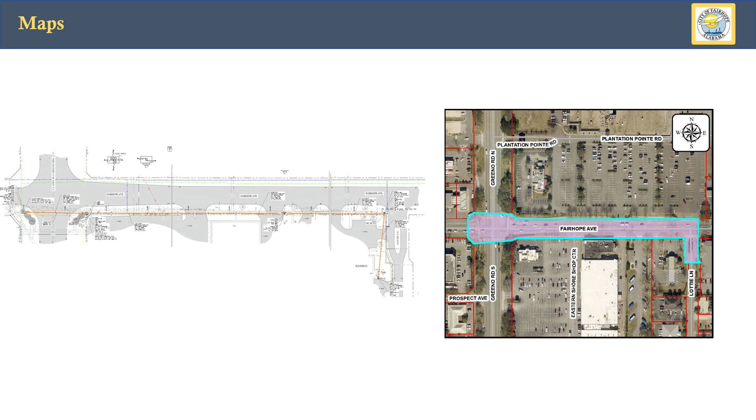Yes, and we do have two of these, so I'll go through them pretty quick. These are pretty much standard. The first one is for 1,000 linear feet. This is along Fairhope Avenue. Familiar, that building right there is the Ecor Rouge Shopping Center. Cafe 98 on the north-hand side, so that shows you the area where this will be installed. Other than its location, there's nothing unique I want to verify here. Just to always remind folks that we can only handle 750 feet of locates in one given day. They can get those beforehand. Those are good for 21 days, and then do all the work at once. But other than that, we do recommend approval of this, with the exact same conditions we have for most of these. All right, thank you, Hunter.

These are not public hearings, but would anybody from the public wish to speak about this item or have any concerns? In that case, I'll go ahead, commissioners.

I'll let you know, I did speak to our right-of-way supervisor about this today, about these first two cases, and he said we were in good shape on everything. He's walked it, and he's met with the contractor on it.

You want to make that into a motion, Aaron? Sure, I'll make a motion to accept. We're going to do them one at a time, right? Yes, let me present the second one, because there's one note on that. But go ahead and make a motion. Yes, I'd like to make a motion that we approve UR 23.04 with staff recommendations. Do I have a second? Second. Motion and a second to approve subject to staff recommendations.

Any further discussion? All in favor say aye. Aye. Any opposed say nay. Motion passes unanimously. UR 2305.

Same project, same type of project. The area is highlighted on the screen, Magnolia Avenue Summit. And the only thing noted here is it takes some care around Church Street. That's a new street we just got finished. We don't want it to look horrible on a brand new street.

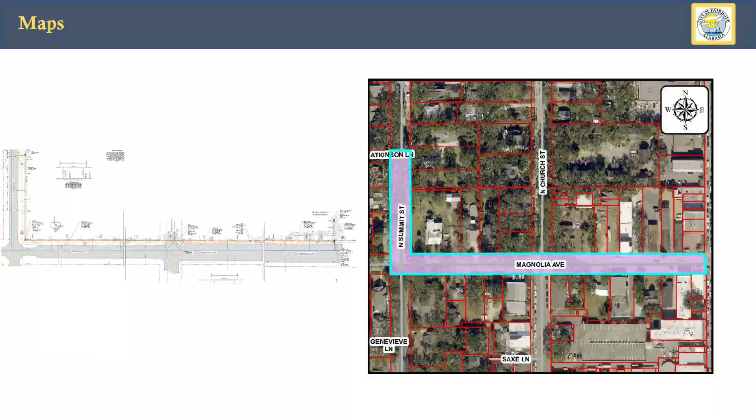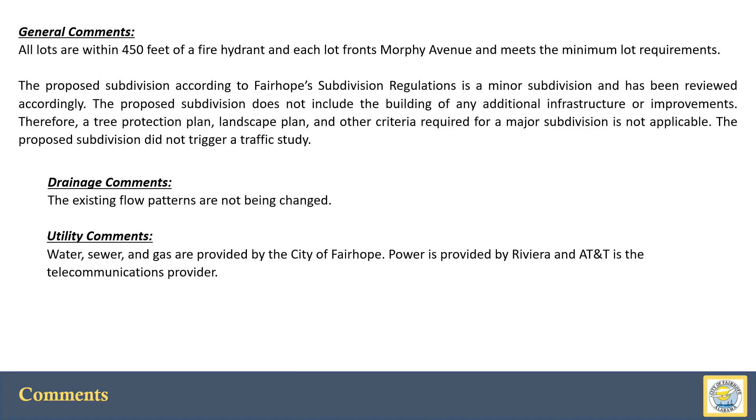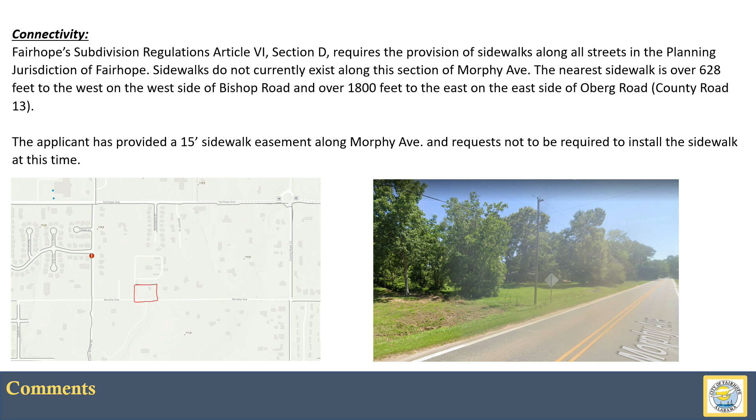I mean, that corner piece is zoned R4, 658 feet to our property. He was saying 650, that's what I was thinking. So at some point you would assume that that would be some kind of multi-unit, which you'd certainly like sidewalks along. And adjacent surrounding, everything in orange is R3, which we do not allow anymore, but it is zoned that way from back in the day.

But sure be nice to eventually be able to walk. I mean, who knows how long that property stays R3, whether it stays R3 1 year or 20 years. Sure be nice to be able to walk to Bishop Road and to the school and other areas. So I'm pretty much on the fence on this one. If it was just a little bit closer, I'd for sure say they ought to build the sidewalks. If it was a little further, no, but this one's just right in that gray zone.

And with the sidewalk coming on the other side of the road, to me, that kind of pushes it into a grayer zone, but.

And that's the same conversation we've had internally.

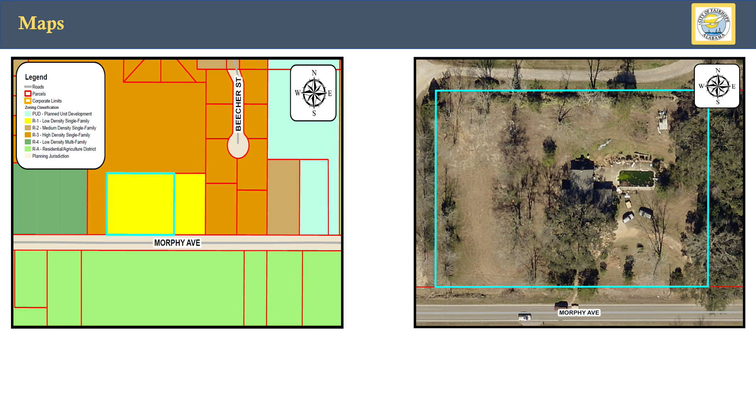As R1, you don't see too many R1 lots these days. That leans me toward, well, okay, let's not punish for R1. But if that R1 lot came in for a rezoning to match some of the other things around, I would certainly hope, whether that's 5 years from now or 20 years, I hope that zoning request would come with a grant to change, would require the sidewalk, if we choose not to require it tonight. Sounds fair.

Okay. I move that we approve SD 2310 Domes Place minor subdivision. Second. Are you subject to staff recommendations? None, there aren't any. Well, don't we need to, should we put that down? I mean, if we don't have a staff recommendation, don't we need to include that we're accepting the, we need to include the waiver, don't we?

It's not a waiver. Remember, we changed the subdivision regulations, so that wouldn't require a waiver that had to be advertised. It's just a decision you make. I mean, shouldn't we say subject to getting a sidewalk? They already provided it. So, oh, that there's a lot of times when people don't put it on, but it's already on the plat.

I'm late, do I have a second? Second. Any further discussion? All in favor say aye. Aye. Any opposed say nay. All right, motion passed unanimously.

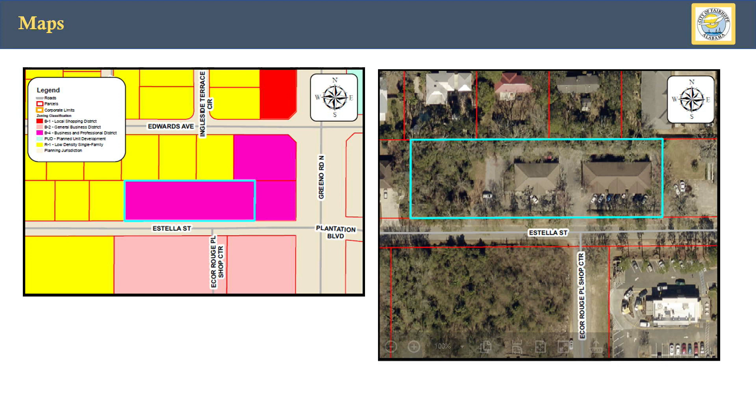And that's what it looks like. There are the 3 lots.

Okay, so all the lots are within 450 feet of a fire hydrant, and they all front Estella Street, and they meet all the minimum requirements. This is a minor subdivision, and it didn't have a tree protection plan, landscape plan, and all that are required for a major subdivision, and it all checked out. Just a note that the final plat has to be recorded within 120 days of approval. So the existing flow patterns for drainage are not being changed, and all the utilities are accounted for.

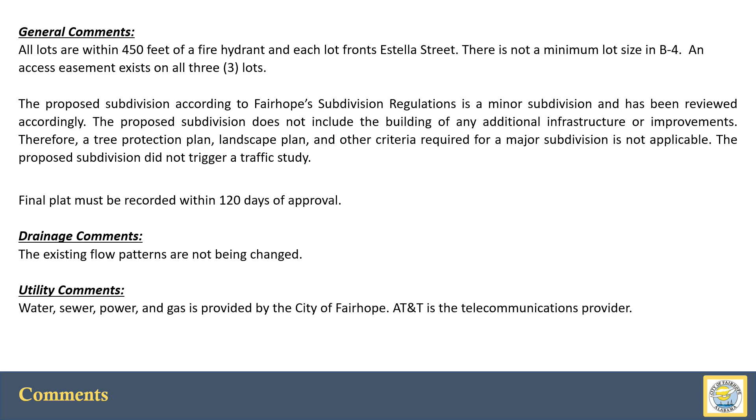So with sidewalks, there are no sidewalks currently on Estella Street, and there are no sidewalk easements on the adjacent plats either. The closest existing sidewalk is 164 feet east on North Greeno Road, and the applicant is requesting not to install sidewalks at this time. However, the Planning Commission allows for a 10-foot sidewalk easement in lieu of installing sidewalks, and there's already a 15-foot utility, drainage, and sidewalk easement on the plat that crosses all 3 lots. The single taxpayer is part owner of the subject property as well as all the other properties along Estella Street between North Ingleside and North Greeno Road, so there's an opportunity to coordinate there.

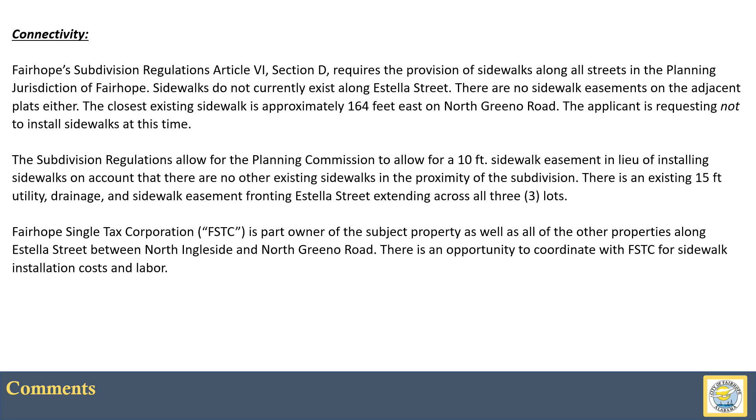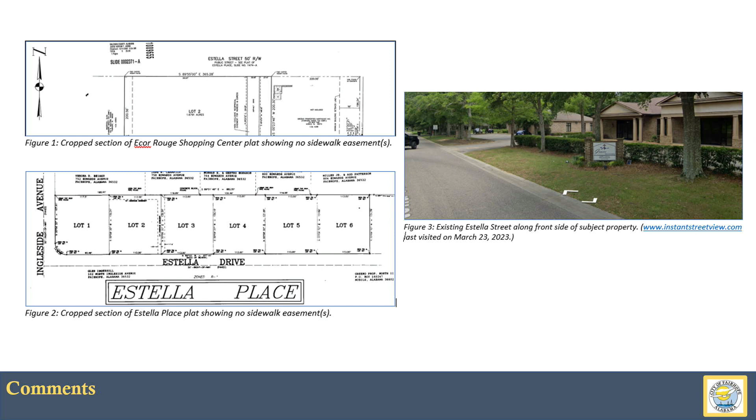So that's what it looks like. There are no sidewalks, and the top is the Ecor Rouge Shopping Center plat with no sidewalk easement. Estella Place also does not have sidewalk easements. And we do recommend approval of the Myrick Place minor subdivision.

Any questions for staff at this time? For what it's worth, we think there should be sidewalks on this one. How far away are we really from Greeno? It's 163, I mean, 164 feet. That's pretty significant.

And it's a big sidewalk down on Greeno Road. It's business, it's going to keep being a big business development across the street. It's commercial, yeah, and it's just one property away. I don't know how they did that originally without a sidewalk. When I was looking at the plats, I thought that was strange too. Neither one, especially the Ecor Rouge, because that was relatively recent.

Any questions for staff at this time? Anybody here on behalf of the developer? Seth?

I'm Seth Moore. On this one, it is a little bit unique because there are a lot of trees between the back of the curb and the parking area for the businesses that are there. If you had to put in a sidewalk there, you'd be right up against the curb because of the trees, you'd have to cut them down. I know you don't want to cut those down because there are several heritage trees in the right-of-way, over 24 inches, oak trees in that area. I do know the property to the east of this is pretty much all asphalt up to that sidewalk, and just wanted to give you that information.

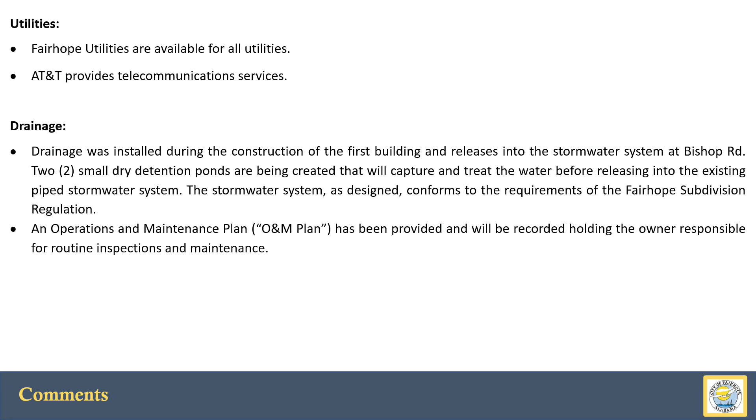An O&M plan has been provided and will be recorded, holding the owner responsible for routine inspections and maintenance. Green space meets the 20% as required by our subdivision regulations, and the sidewalk is proposed along each side of the private drive.

There is a nice fence there that does prohibit it from connecting to the existing sidewalk on Bishop. We'll figure out the best way around that, but I don't necessarily want to knock that fence down with a nice rod.

If we've got any conversations on that one, we can have them, but staff does recommend approval of Washington Square MOP with only one condition, just for Eric: certificates of occupancy for residential shall not be obtained until the final MOP plat has been approved.

I did talk to the applicant today, and they do want to get started with vertical construction as soon as possible, but until some of that infrastructure's in and it gets recorded, as y'all know, we have the final plat, so MOP plat. I think everybody's on board with that condition, but happy to discuss or answer any other questions you may have.

Sounds good. Any questions for staff at this time? All right. In that case, anything George, do you or SE Civil have anything to add at this time?

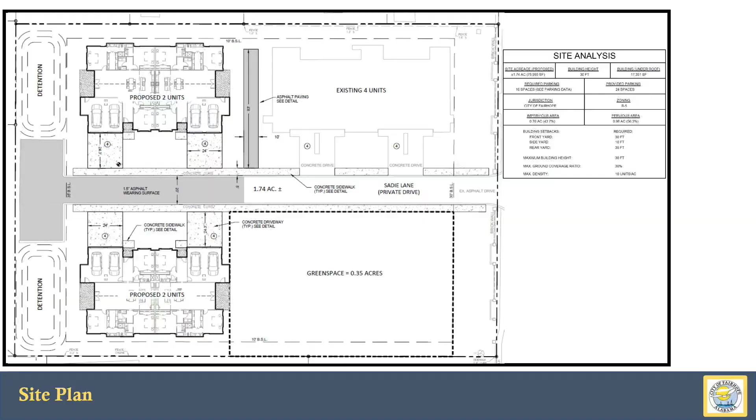I guess, is it even feasible with the detention to plant anything on that small slope? Would it work? His property is not where the detention pond goes. If you'll scroll... His property is directly north of the building on the property.

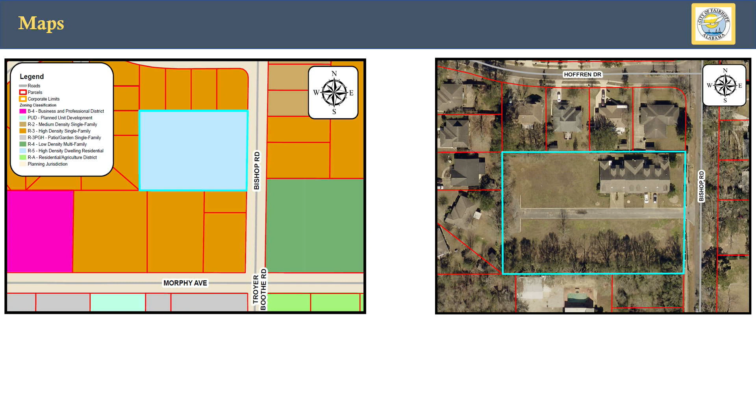So just to clarify, the original MOP didn't have any buffering requirements? There was no MOP back then. It's been there a long time. Residential against residential is not a requirement. Even with different densities? Yeah, basically you've got 2 units in front of 2 units, and we don't have any requirements. If he wants to do what he can, we don't have any requirements.

I mean, requiring him to do it more just because the other was first and he's second - the other can build a fence as easy as he can build a fence. They both got their private property rights. We don't have any authority to require anything more than what our subdivision regs and MOP requirements are. I was just following through on what I was told. I understand.

The property owners from the street out to our property, they have fences - I used to have a fence. The developer has their own fence, so literally fences that back up to each other, all the way down until you get to the point. I was assuming when they built that, was that no problem with the development? It's nice, it was nice then, has been, will be nice now. But I just asked them a simple question: since you already have a fence that you started at that point, you continue it until it closes off the view. They said they were sure I would be satisfied with the plan. I understand, and that's why. Thank you.

All right, commissioners, I will entertain a motion if there are no further questions or concerns.

I'll make a motion that we approve SD 23.12 with staff recommendations, which I think are none. I've got a motion to approve subject to staff recommendations. Do I have a second? Second. Any further discussion? All in favor say aye. Aye. Any opposed say nay. All right, motion passes unanimously.

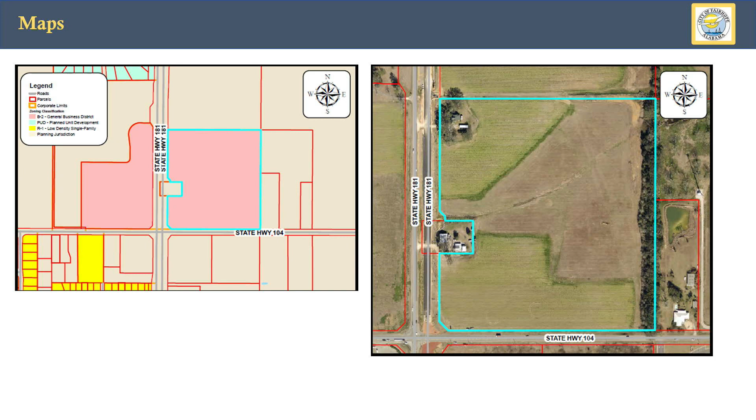So it connects to the previously approved Rockwell Place to the north via Bushel Drive, which is intended to...

Can we pause for just one second? Hunter, I see the applicant from the last item was walking back and asking about the sidewalk. We weren't clear about that one way or the other in Washington Square. Does that mean that the sidewalk is included? Since Chris, our attorney, is not here, I just want to make sure that was the intent of the motion. We've already started this one. If we finish this one before we get to the next agenda item, let's discuss that. If we need to open it back up, we can. Okay, just to clarify that point, that'll be fine. Great, thank you, Hunter. Yes, ma'am.

So like I was saying, the subdivision connects to the previously approved Rockwell Place via Bushel Drive, which will ultimately be a City of Fairhope public maintained street. The applicant has provided sidewalks as well as a multi-use trail throughout the property, and it's nice because the multi-use trail is off the major roads. Each individual lot, in its site plan review, shall design and construct internal sidewalks that will connect to the sidewalks that are platted and/or the multi-use trail.

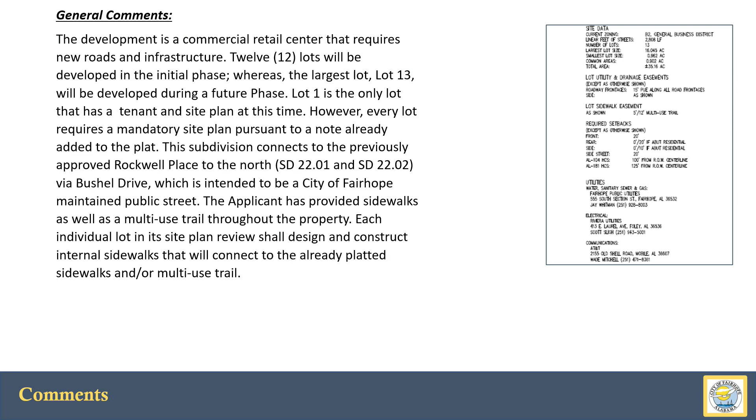Okay, so all connections and work in the ALDOT right-of-way will require permitting from ALDOT.

Jade has met with Fairhope Public Works and Fairhope Utilities and discussed alternative sanitary network routes. It's our understanding that they are currently revising a utility plan based on that meeting. They were given options, and Jade chose an option. Trey's here, he can talk about it.

The water is provided by the City of Fairhope, as well as the sewer. They have a caveat: the final construction plan shall be approved by the Fairhope Water Sewer Superintendent, including potential aid to construction costs, and all materials shall meet the current version of the City of Fairhope standard specifications for constructing sanitary sewer facilities and water facilities. So power is Riviera, gas is Fairhope, and telecommunications is AT&T.

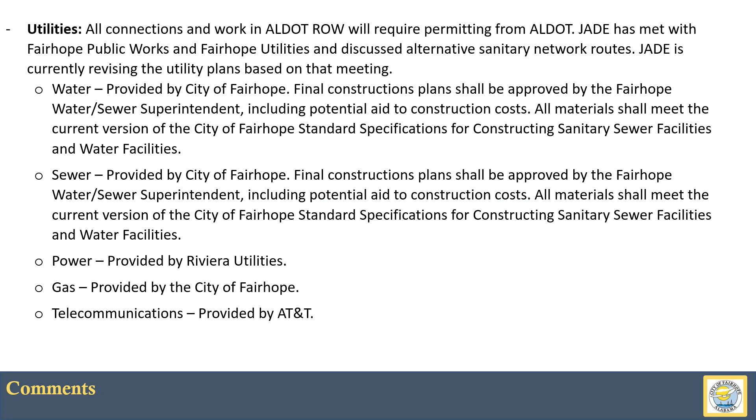Okay, there was a very robust traffic study done, almost 300 pages. We all know that ALDOT is currently improving Alabama Highway 181 - all 4 lanes are open, kind of. There was extensive study completed that included traffic studies from the Publix and also the Rockwell development.

And this is out of the traffic study, quote: based on anticipated traffic volumes, an eastbound left turn lane on Alabama Highway 104 onto Driveway 1, a westbound right turn lane on Alabama Highway 104 onto Driveway 2, and a northbound right turn lane on Alabama Highway 181 onto Driveway 3 are warranted. So that translates to Bushel Drive, Hidden Glen Drive, and Encounter Drive in this project.

So the Rockwell study determined that there should be a traffic signal installed at the Alabama Highway 181 entrance to the Rockwell development. And there, as we know, is an existing one on 104 and 181.

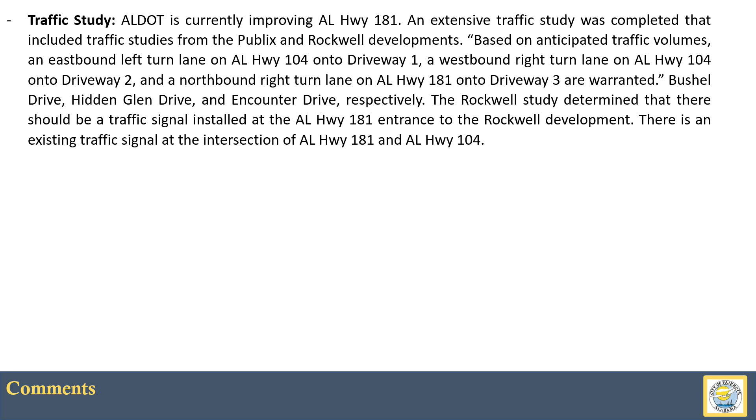So this just in. So we're going to tag you.

Yeah, so we did have a note in there on what the traffic study was. As most of you know, I'll just repeat, a traffic study is not an exact science, and it's not a go or no-go for a project. It's about what improvements should be done. And for the most part, any improvements to 104, 181 are included in this project.

There is a permit from the property to the north in ALDOT right now to install the traffic signal. There could be a potential threshold where this builds out faster. I don't think that's likely. That one has a condition - they can't even occupy the building until that's installed. So I think everybody's moving in that direction.

It's also a guess in the traffic study about what uses are going to be out here. So they basically said 3 fast food places, a car wash, and some apartment homes, 100 apartment homes, that generates 12,752 trips. That's likely not how this develops. Since that traffic study, this creates a few more lots, so it could be other businesses, and it's hard for that exact science.

Now, the internal drive will be a city road. So while there's not likely to be any improvements on 181 or 104, there could be on the city's road. So how we've addressed this right now is we've already said every site out here will have a mandatory site plan review. So what we would like included with that application is the exact trips generated. It's just a layer that we can kind of cumulatively look at, make sure we're not hitting any thresholds that we need to be looking further on improvements for our roads. Think that's a simple solution that we just can't figure out right now. But I'm going to turn the mic back over to Michelle.

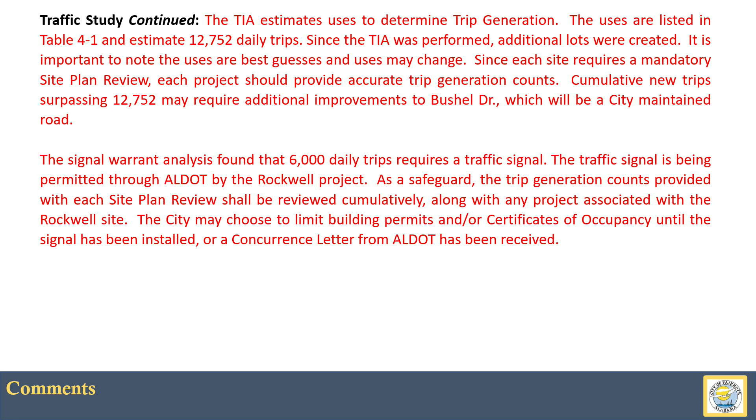Okay, so the site drains in a single primary direction, west to east, into an upper tributary of the Pensacola Branch. The project stormwater runoff is designed to be collected by a series of inlets that's routed via a storm pipe network to a single wet detention pond, which is located on the largest parcel, which is lot 13. So if and when lot 13 has a development plan, the stormwater management system will need to be updated.

Low impact development methods are suggested to control the runoff characteristics. The stormwater management system regulates the post-development runoff release rates below its respective pre-development rates, which is required by the City of Fairhope.

So there is perimeter landscaping, provided along both highways. The wet detention pond also has trees planted around it. And the applicant has provided an email from ALDOT, where ALDOT has approved green space within the Highway 181 construction setback area, which is different, but we're excited to have that. So the said email is in the packet. And the city horticulturist has approved the tree preservation plan and the landscape planting plan.

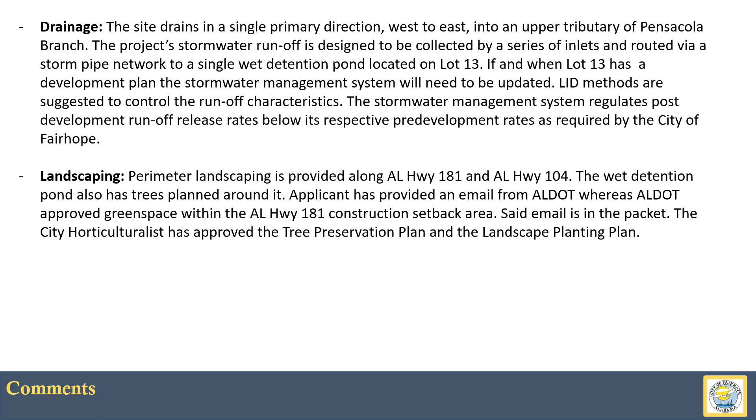We've never really had to address this because it's an anomaly - a lot that's residentially zoned by the county. The ordinance doesn't clarify whose zoning it refers to.

Okay, so at the request of the city, the applicant did put a 12-foot wide multi-use trail throughout the subject property, as well as sidewalks that will keep pedestrians off the major state highways, which is nice.

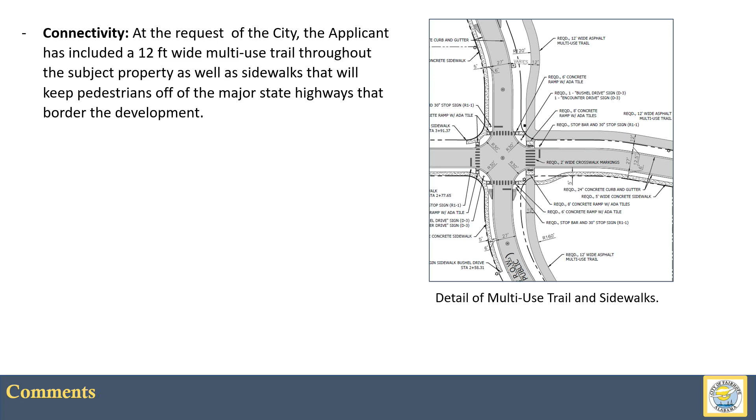So staff does recommend approval with the following conditions. As noted in the staff report, the revised utility plan shall be approved by the City of Fairhope Water Sewer Superintendent prior to issuance of a construction permit. And the revised drainage plan shall be approved by the City of Fairhope Public Works Director prior to issuance of a construction permit. Provide the required buffer strip adjacent to the north property, the 10-foot yellow one we just talked about. Each lot shall require a mandatory site plan review, which is already a note on the plat. And the projected trip generation shall be provided for each use with the site plan review application so we can keep up with those cumulative amounts.

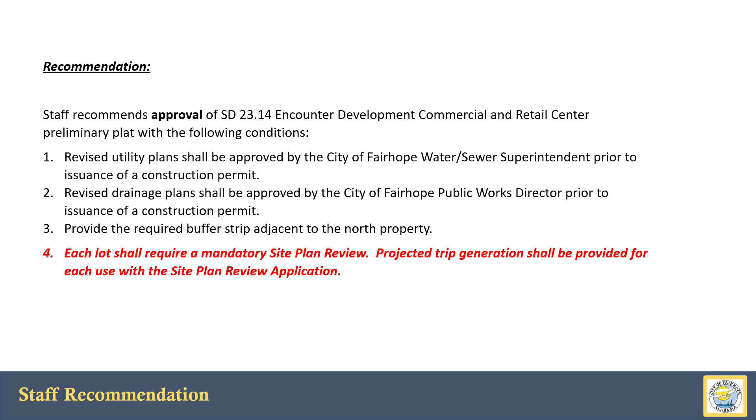And since the staff report, we've already received the revised drainage and utility plans. There's no harm keeping those conditions because they're still going to finalize the review of those plans before we see a permit. Any further questions for staff at this time?

Who would approve those mandatory site plans? Who would do the actual review? Ultimately the city council, but you'll review those and make a recommendation to the city council for any site plan review. Okay, gotcha.

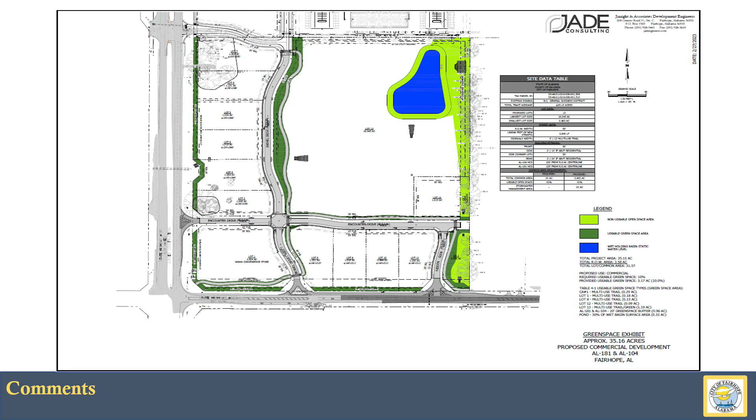Depending on the actual use, one place may have two driveways, but there may be an opportunity for lots 6 and 7 to share a driveway. We're going to share those driveways to try to limit curb cuts, so we don't arbitrarily have a curb cut on every lot. Where uses are compatible, we're going to have joint and shared parking. That's something we're aware of and working toward, and the developers agreed to that, so I'm able to say that to you for the record tonight. We didn't want to make it a condition because it's hard to define and we wanted to leave some flexibility, but that's the intent.

Okay, and the developer, Bill, I know y'all talked about that, so I appreciate your agreement with those concerns. All right, commissioners, any more questions? If not, I'll entertain a motion.

I'll make a motion that we approve SD 2314 with staff recommendations, which are... we did add one, sorry, we did add the one in red, for the trip generation and site plan. So the four staff recommendations. Okay, I have a motion to approve, subject to the four staff recommendations on the screen. Do I have a second?

Second. Any further discussion? We have received the revised utility plans, and Jason signed off on those. We have received the drainage plans, and Richard signed off on those to this point. They'll finalize by permit. I know they've received the plans, and big picture, they're happy. Have they gone down and looked at every invert? I don't know, I can't answer that. Understood, but they have them. Yes, absolutely.

Any more further discussion? In that case, all in favor say aye. Aye. Any opposed, say nay. All right, motion passes unanimously.

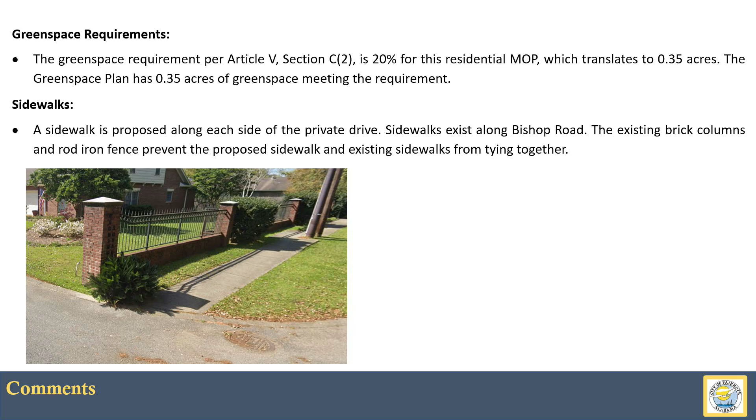There's the picture. What are the sidewalks within the property for 8 units? Does it matter if it's maybe one side of the road? I don't know if the other side of the road looks like this. I'm not sure how you get that sidewalk out into and connect to this sidewalk without tearing that fence down. Well, the only other way is going to be to actually swing them into the street. Swing it in, it's the only way. You could just take a section of that and cut it out, maybe do a little paver or gravel or something creative.

Couldn't you, Britt, cut a section of that wall and take a section out, leave the column? Yeah, I could, you just don't want to. I don't want to. You don't think it'd be nice? I have a building on that north side that is existing, with mailboxes and landscaping there. I'm not going to tear that up to put a sidewalk on that north side. I might put it on the south side where the green area is. That's a private road going in there - you can walk across the street, get on the sidewalk and go where you want to go. But to put a sidewalk on both sides of that, it might end up being a gated community where you can't get in it. So, I mean, it's private, and you've got a sidewalk in the front of it.

So you don't want a sidewalk on either side, or just on the south side? I don't want a sidewalk on the north side. Okay, but you don't mind one on the south side? I will build it on the south side.

Okay, after construction is completed, not prior to. Because if you tear it up, it's crazy to put it in before. Okay, that seems fair enough.

Wait, so I need to amend my motion. If you want to amend, yes, we need to open that back up. But there's also another issue you brought up. We expect that to be installed before final plat. By final plat, yes, and the other condition was no CO until final plat. So they can get some vertical construction underway without putting the sidewalk in, since we're not creating lots, but the sidewalk would have to be in for the CO basically.

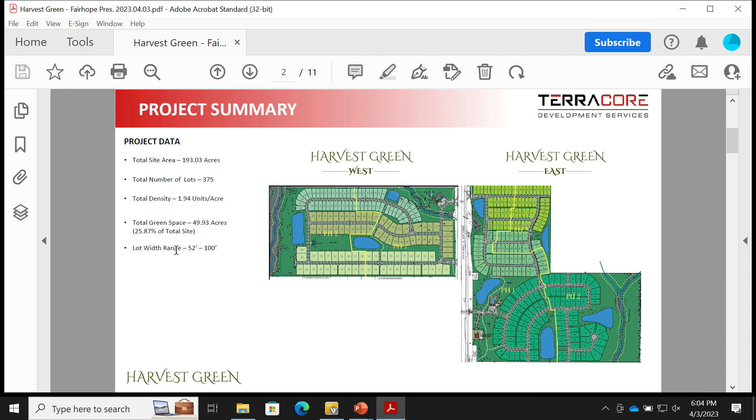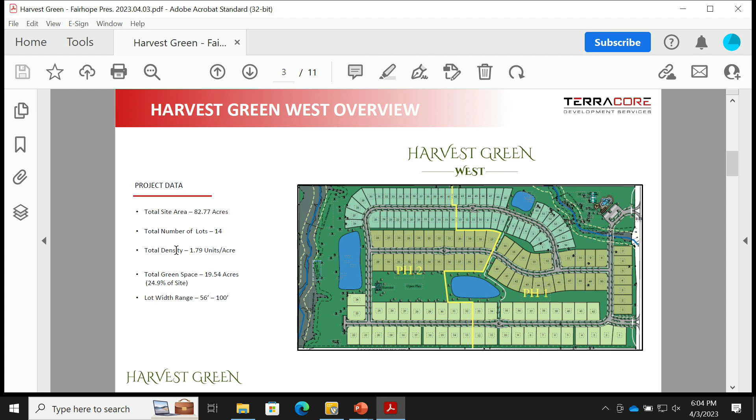This is a blow-up of Harvest Green West. I won't go through all the details, but it's still under 2 units per acre. This side has almost 20 acres of green space, and the lot ranges are 56 to 100 feet.

There was a comment during the review process of both West and East that the amenities needed to be constructed with phase 1. We responded to that comment saying we request them to be constructed within 12 months, and we didn't really ever hear anything back. It wasn't a condition, so we just assumed that's where we were going. But here we go assuming, and that's why we're here today - we want to make sure that when we're coming ready to get our final plat approved, there's no question as to where we stand on everything.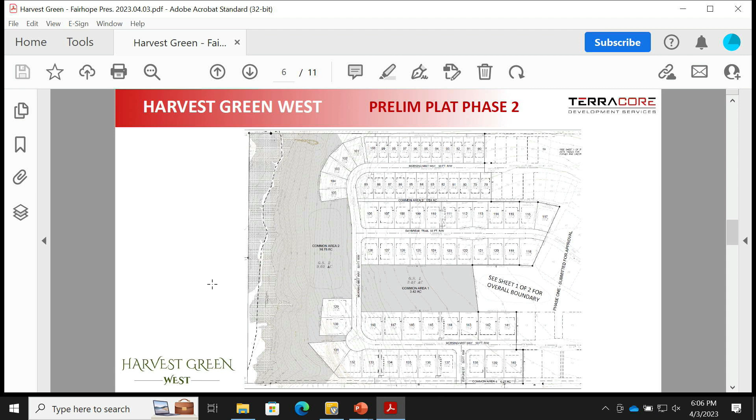This is more of the phase 2 plat for the west side. Harvest Green East, 110 acres, 227 lots. This one's got a total density of just over 2 units per acre, 2.06. Total green space, 30 acres, and lot ranges between 52 to 75 feet.

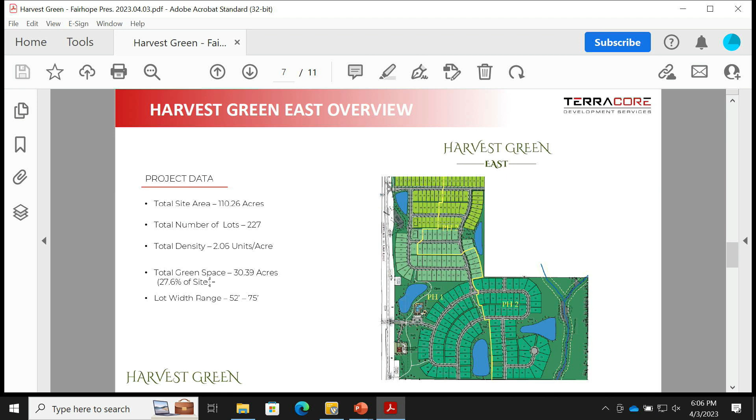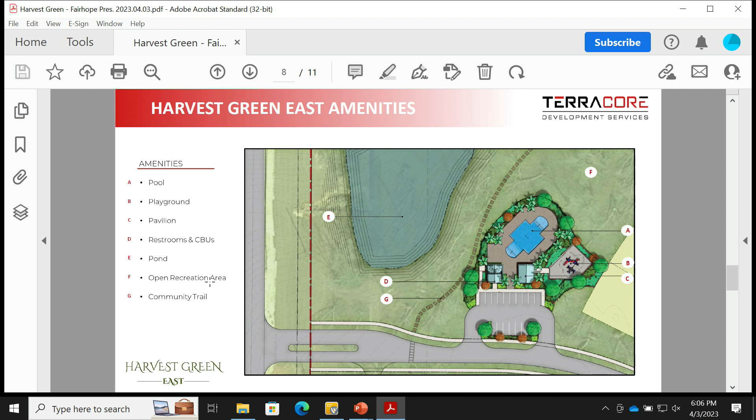This is the amenity package for Harvest Green East. It has a pool, playground, pavilion, restrooms, mailbox units, pond, open recreation area, and a community trail system going through the development. Again, here's the plat for the different phases, and here's a summary of the different amenities. We're just requesting, for clarity's sake, that we be allowed to have the amenities completed 12 months after final plat of phase 1 for each of the respective communities.

That's all I have. Sure. Are you asking us to say anything on this, Hunter? This is their question, so if I can help facilitate.

From a 30,000-foot perspective, forget about Harvest Green specifically, and get up to where we're not looking at the trees, we're looking at the forest. My personal belief is if the amenities have to do with our approval, we ought to require them to be done or bonded just like a landscape would. With that said, I want to be careful about having the amenities be part of the overall decision, because golf courses, swimming pools, tennis courts can all be sold or shut down by an owners association vote. We don't have any say over that one way or the other.